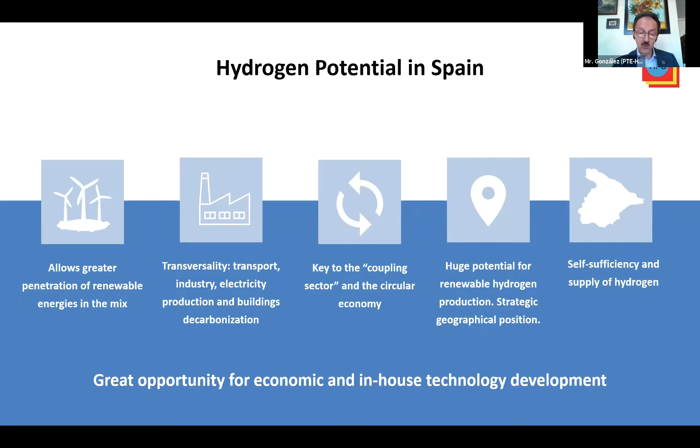Taking into account all of that, in the case of Spain, our potential is based on the capacity to produce renewable electricity at low cost, which means we can produce renewable hydrogen at low cost also. It is also based on our geographical position, which is strategic. And also, we believe it's based on the capacity of our industrial fabric, which will allow self-supply of hydrogen and even export of surpluses to our northern neighbors.

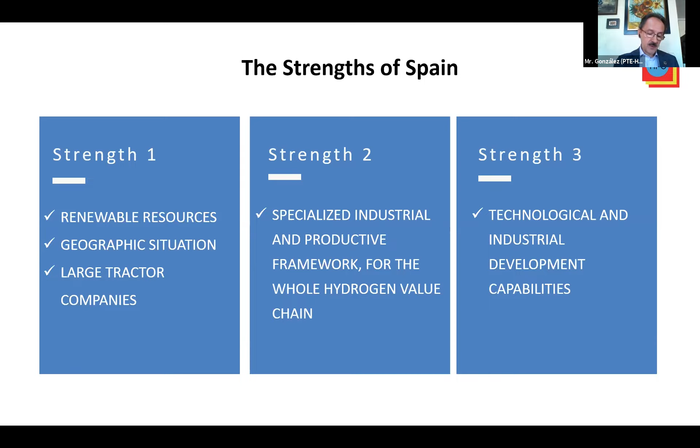This slide summarizes the strengths of Spain in the technology. As I said, we have a high level of renewable resources, a very good geographical situation, large tractor companies in place, a specialized industrial and productive framework for the whole hydrogen value chain, and technological and industrial development capabilities available. So the current context offers the Spanish sector some opportunities, but at the same time the sector has to face some weaknesses that I will summarize in the following slides.

Firstly, the opportunity to have a made-in-Spain technology faces the weakness that we have in public-private collaboration. We have a very good global position in terms of international scientific publications, between 3 and 4% worldwide, which clearly exceeds almost double the contribution of Spain to the world GDP. But this knowledge is not well transferred to industry. So what is required here is to orient R&D plans to industry objectives, and to promote technology clusters in order to facilitate science-technology-industry collaboration.

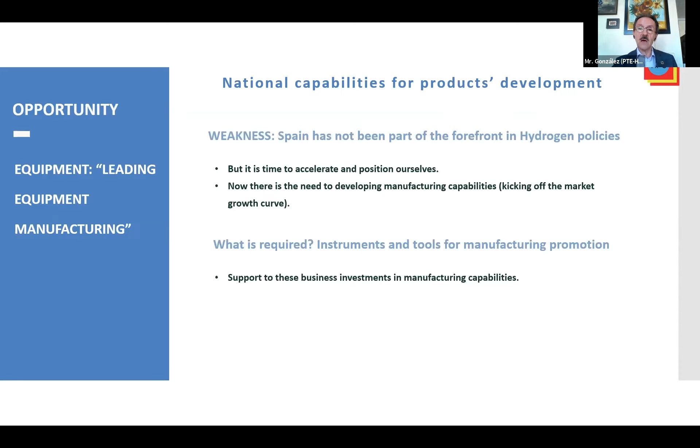Secondly, we can achieve a national capacity in products development. However, the weakness here is that Spain has not been at the forefront of hydrogen policies during the last years. Therefore, it is necessary to press the accelerator. I really believe that we are accelerating very rapidly, but there is a need to develop manufacturing capacities, and this requires strong investment support.

And thirdly, we have the capacity to self-supply and even export hydrogen, but our weakness is that we start from scratch. Of course, I must recognize that we already have a framework for promoting hydrogen, but it is essential to deploy strategic national projects to promote demand creation and to eliminate administrative and regulatory barriers. All of that implies a very diverse set of regulatory actions on both sides—the end-use side and the production, storage, and transport of hydrogen side—including, of course, the guarantees of origin.

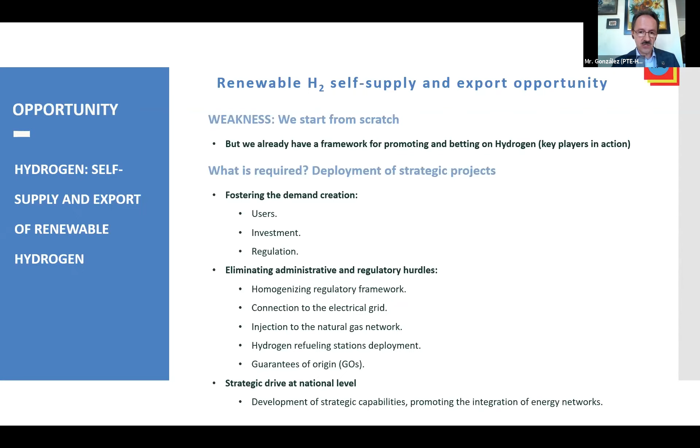In December 2020, we published an analysis of the sector from the point of view of R&D activities. And in March 2021, we published two reports: one in which we gather the ongoing activities, the projects in R&D, but also another report, which is a guide including all the members of the technological platform and the technology available to each of them.

It's also important to say that the Spanish Hydrogen Association is in the process of finishing the sectoral agenda of the hydrogen industry in Spain, which is a document that will be included within the strategic framework of the Spanish industry. For several months, three working groups dedicated to market and technology, to priority measures and actions, and to R&D, with the coordination of the Spanish Hydrogen Association, have been working on the development of this agenda.

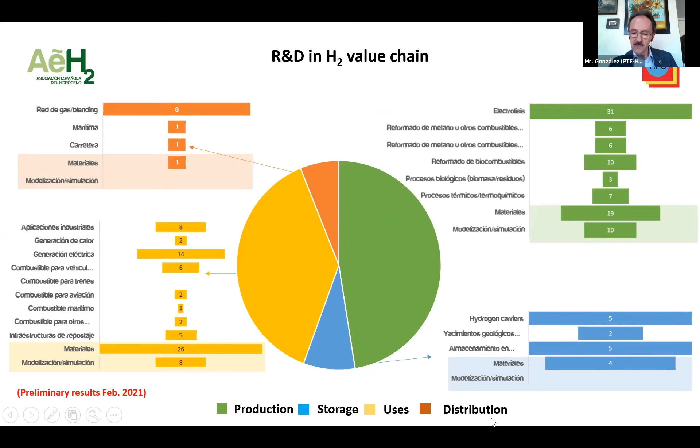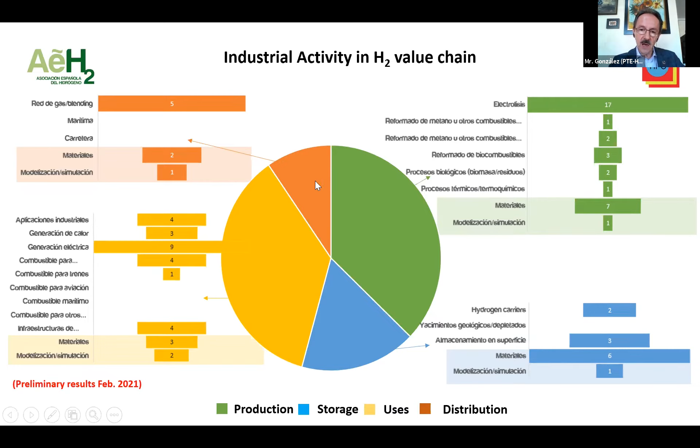But if we go to industrial activity in the hydrogen value chain, once again, industrial activity on production and uses of hydrogen dominates. But now the activities on storage and distribution take a bigger part of the pie. Concerning potential business lines, there's a more balanced distribution, but in any case, engineering, consulting, promotion, and equipment manufacturing are the dominant ones, followed by R&D, the supply of materials and components, and finally the distribution of equipment.

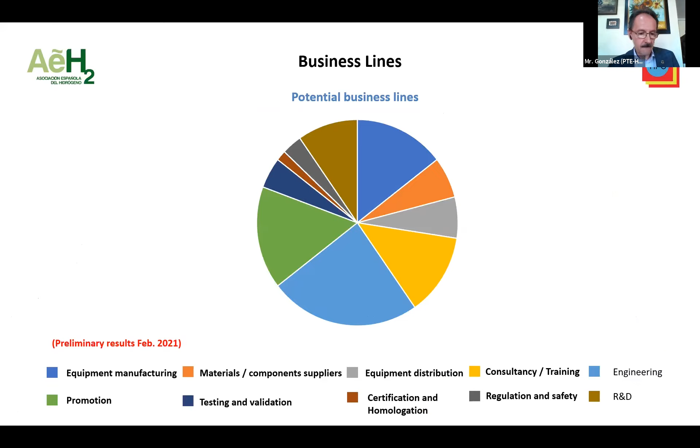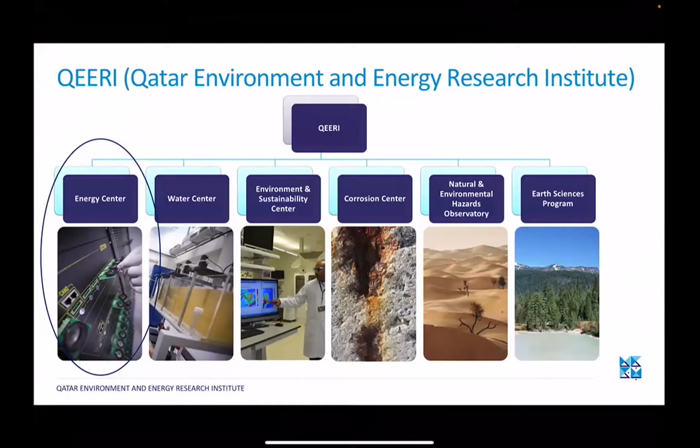So just a very brief introduction, to complement what Dr. Mark told you a few times this morning. QEERI is composed of four main centers, one program and one observatory, and I'm leading the Energy Center, where we are trying to help Qatar in its actions. Qatar is taking a range of actions to reduce its greenhouse gas emissions, to reduce its carbon footprint, and to position itself as a leader in the development of climate change and clean energy technologies.

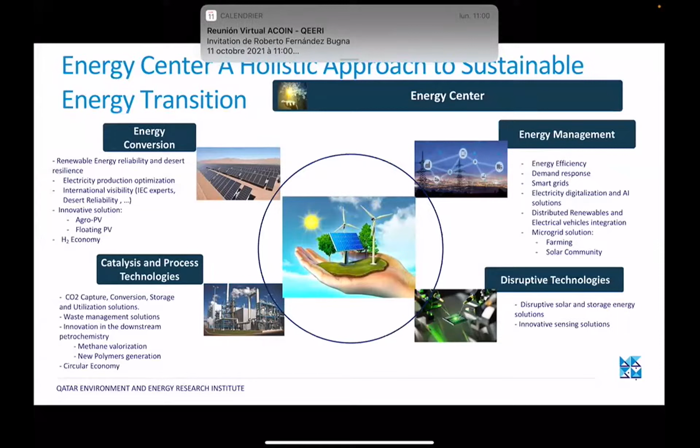So domestically, Qatar has a renewable energy goal of sourcing 20% of the country's total energy from renewables by 2024, which is something that is happening all around the globe with the different countries' net zero emission targets by 2050. So developing clean technology is also a focus for Qatar, given its natural resources, an opportunity to develop technologies that address specific climate change challenges for Qatar and the GCC, and that can be commercialized and exported globally.

And these are things that we are doing in the energy conversion program and the energy management program, two of the 4 programs we have in the energy center that are related with clean energy and energy transition. However, there is no realistic path to meet net zero targets that only involves going towards renewable energy. And there is no realistic path to net zero that involves abandoning fossil fuels completely or even stopping industrial activities.

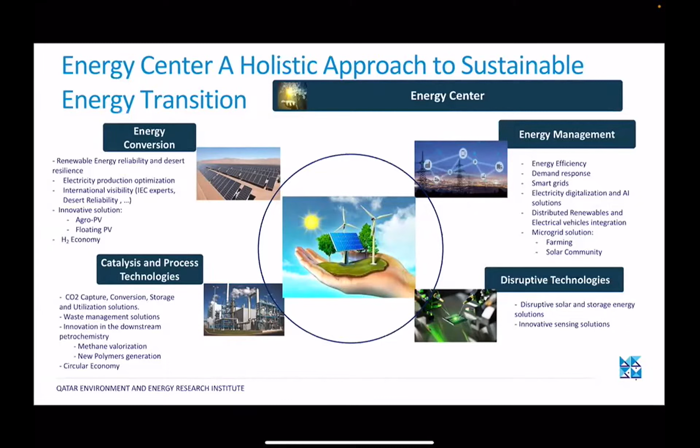And this is why if we think of a sustainable industrial and societal development with net zero emissions, this can only be achieved through a collective effort of adopting commercially viable and renewable technologies, along with enhanced utilization of natural gas, CO2 and CO2 derived feedstock. And this is what we are taking care of in the catalysis and process technology program, and this is the subject of today's discussion.

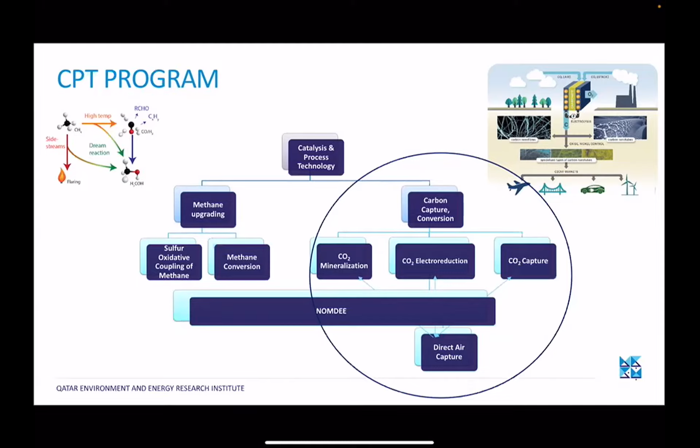In the catalysis and process technology program, we have 2 main axes of research. One is related with methane upgrading, and the other one is related to carbon capture and conversion or utilization, which will be the subject of the discussion about the projects that we are having here in QEERI, and that are really close to the industrial needs.

QEERI's Energy Center mandate is to support the competitiveness and sustainability of Qatar's energy sector, as I told you before. And what we are doing in these carbon capture projects is to develop technologies and innovate in the uses of CO2 through the development of new technologies to make this technology more attractive to the market.

So our main project for carbon capture is related to direct air capture and conversion. What we are trying to do here is to reduce the industry carbon footprint by converting waste to revenue and ensure sustainable industry development. So in this part, we are working on direct atmospheric capture, as I just told before, and this technology is under development.

It uses innovative materials and practical novel CO2 absorption and regeneration to bypass and reduce the high consumption stages compared to the other CO2 capturing technologies that are developed worldwide, mostly at emission sources very close to the facilities and industries that produce the main streams of CO2.

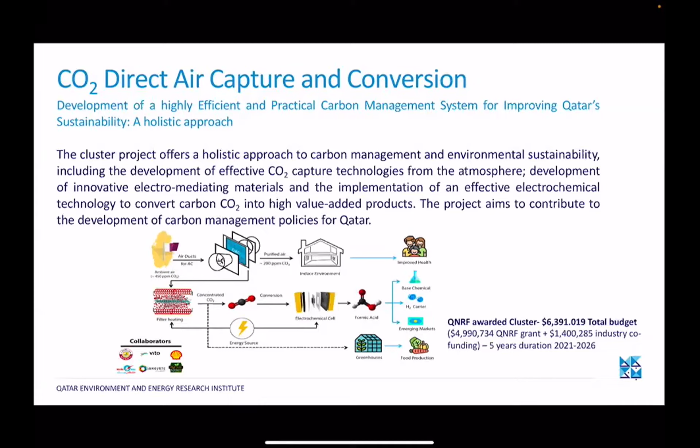In particular, this project is a program that has 5 sub-projects. It has been funded by QNRF with a total budget of $6.3 million, with 5 million from a QNRF grant and 1.4 million from industry co-funding. And as you can see here, we have a large number of partners inside Qatar contributing to the development of this project, as well as international partners.

With this research, we aim to contribute to tackling the environmental issues related with CO2 emission in Qatar and globally. And all these economic and environmental factors will keep Qatar away from the perception of being a polluted country, which is a wrong perception, together with contributing to improve the quality of life in Qatar and potential enhancement of national incomes and economy. We expect the project outcomes will attract investment in CO2 reduction technologies by private companies, as well as national and international research grants.

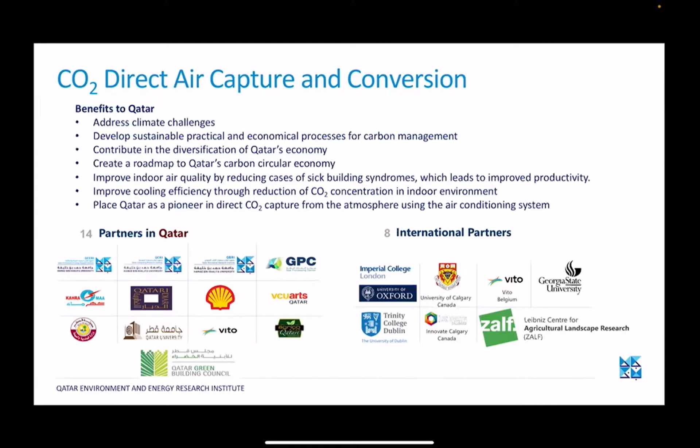If we move to the conversion part, at QEERI we are focusing mainly on CO2 mineralization to produce carbonate products. As I indicated before, we are mainly focusing on CO2 reduction to electrochemically convert CO2 into less polluting and more valuable chemicals, CO2 absorption, and of course, CO2 mineralization.

Why CO2 mineralization? The CO2 mineralization project has the potential of tackling three main issues of global and national relevance in Qatar, which are CO2 emissions, brine waste from desalination processes, and alkaline waste. So CO2 mineralization represents a hot topic in order to bring sustainability and mitigate the challenges associated with CO2 utilization.

The purpose of this specific project is to transform CO2 into solid, stable carbonates, mainly magnesium and calcium carbonates, that can be used in the construction industry, but not only. As you can see, there are many uses for this. Many industries use these carbonates: the textile, paint, paper, and plastic industries, for example, for calcium carbonate, and skincare and cosmetics for magnesium carbonate.

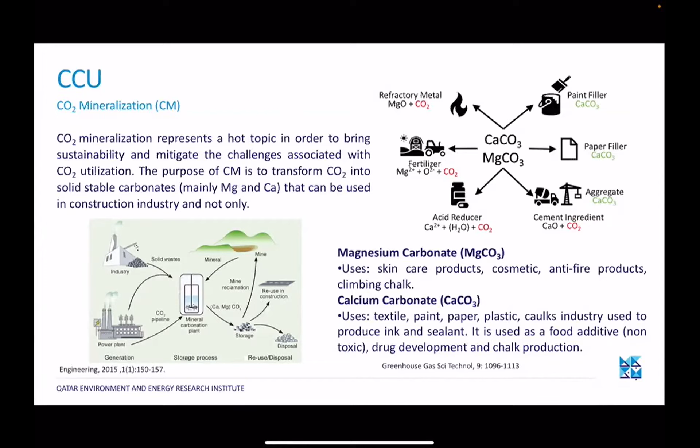We are focusing mainly on magnesium and calcium carbonate, but they are not the only carbonates that we can obtain with our process. We have proof of concept of barium carbonate, aluminum carbonate, lithium carbonate, sodium carbonate, and all of these kinds of carbonates that have a wide use in industry.

What we are aiming for is to develop sustainable, practical, and economical processes for carbon management, while at the same time targeting carbon neutrality and addressing decarbonization challenges in main industrial sectors that are not easy to decarbonize, not just decarbonizing electricity production. I am speaking here of the oil and gas industries, the metal manufacturers, and the petrochemical industry.

In doing that, we are aiming at the same time to address brine waste management, which poses serious challenges in the region, but not only in the region, in all those countries that heavily rely on desalination and the disposal of brine waste. At the same time, we are also looking into the disposal of alkaline residues.

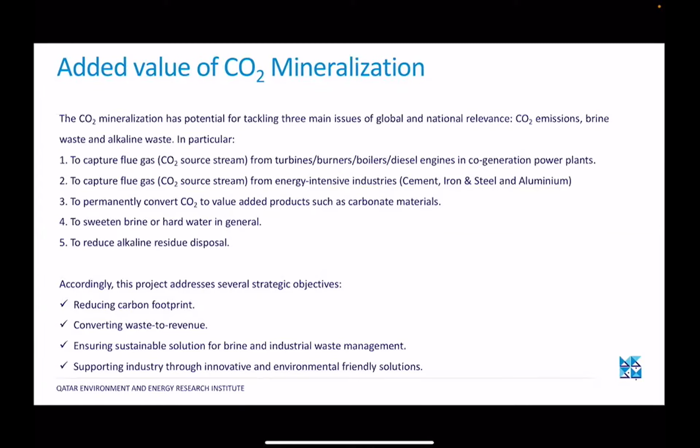If I move a little bit in depth into alkaline industrial waste, I can share with you why we are focusing here. It is because we really think that this application has strong benefits for alkaline waste management and disposal, and not only disposal, it is creating another value for this waste, if I may say, to provide a circular economy in these kinds of industries.

So, just a few numbers. Alkaline waste is produced in more than 1 billion tons yearly, and it's potentially toxic. Alkaline waste is produced and piled in landfills every year, and often it has devastating effects. Our process here is tackling these challenges from an environmental point of view.

Also, alkaline waste can be solid or sludgy. It mostly involves slags, ashes, or muds, and is formed as a byproduct of steel, aluminum, and coal power plants, waste incineration, or demolition wastes. So you see that we are tackling many industrial wastes from heavy industries that are difficult to decarbonize, and we are not only helping to decarbonize these industries, but adding value to this waste.

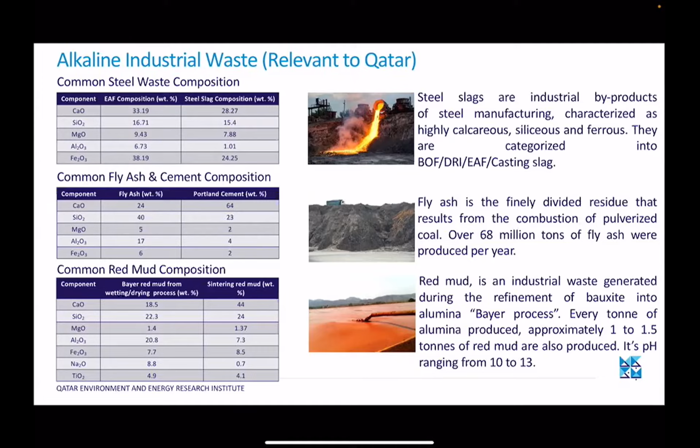Of course there are a lot of challenges, but we at QEERI are very well positioned today in waste management for steel slags, fly ashes, and red mud, and to combine this waste management with CO2 decarbonization.

So what about hydrogen? Because the topic of the conference, this discussion, is CO2 management and hydrogen. What about hydrogen in Qatar, and what are we doing in the field of hydrogen? Today, to our knowledge, there is no real national hydrogen strategy or plan, or at least it has not been publicly communicated. So we cannot speak for the country, but we can share our thoughts and what we see is happening.

So the industry seems to be developing strategies, but as I just said before, there are no public announcements or large scale projects. There are some small demonstration projects being announced, and there have been some QNRF Qatar National Research Funding programs to finance them.

There are, however, some enablers that start to be in place. Gray hydrogen production already exists within industrial complexes here in Qatar. CCS capacity, carbon capture and storage, is being built, and this is mainly linked with LNG trains and solar energy deployment, where QEERI is heavily involved at the national level, is progressing, and more capacity is planned.

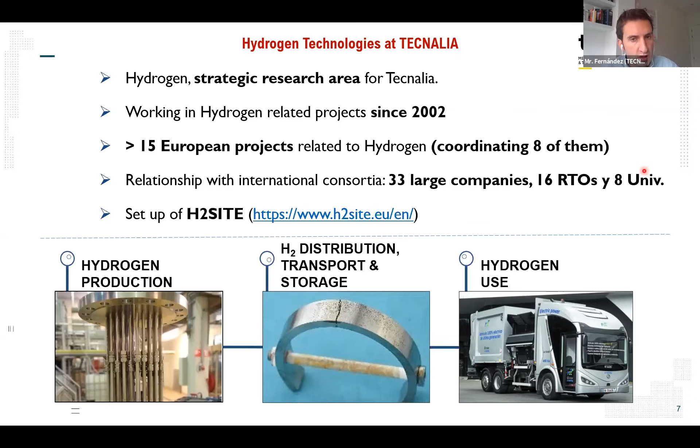To give you some examples of projects where we are working, these are mainly European projects on hydrogen. The first one, the Macbeth project, where we are working on scaling up membrane reactor technology for hydrogen production from two feedstocks, natural gas and biogas, by a reforming process. The aim here is to go from TRL5 to TRL7 in this project, and one of the objectives is to test this membrane reactor technology for at least 8,000 hours in operation.

Another project where we are working is the HyGrid project, where we are developing membrane technology, in this case for hydrogen extraction from hydrogen-natural gas blends, dedicated for distribution grids. As you may know, one of the promising ways to distribute or transport hydrogen is through the grids, the pipelines. In an initial step, the idea is to have a blend of hydrogen with natural gas, and the idea of this project is that at the final point, for the users, we extract this hydrogen that is blended from the natural gas.

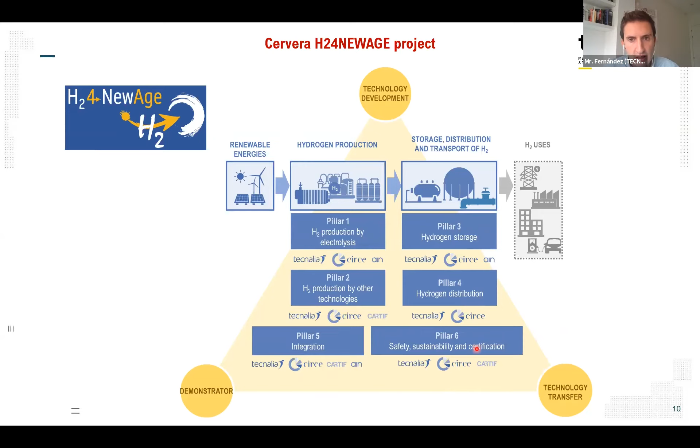So that's all from my side. Thank you very much. If you have any question or want to contact me, I will be glad to answer. And of course, we will be very happy to try to have further collaboration with QEERI or companies from Qatar.

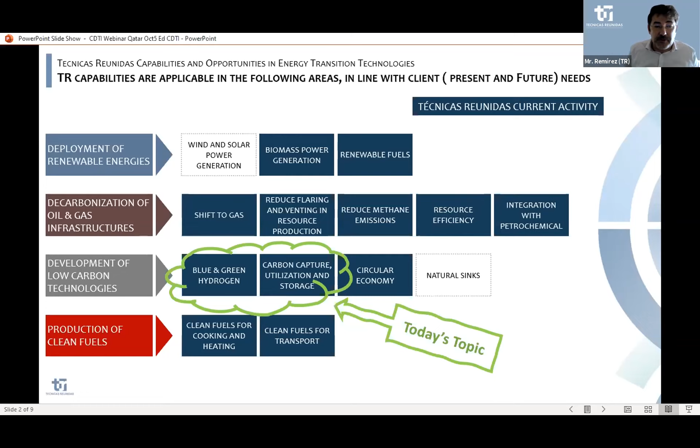Today we'll go more specifically into hydrogen and CO2 capture and utilization. On hydrogen, the topic is basically that we need to address a multi-scale and multi-sectorial exponential growth. Hydrogen isn't just something devoted to oil and gas facilities; it's something needed worldwide, and it's just growing. So the thing is how to be sure that we can make a proposal to our clients in this way.

One of the first interesting lines here is biofuel reforming. It basically means today the main activity, the main way to produce massive H2 is through reforming. What about using something which is not just plain natural gas, but maybe biogas, or other fuels like bioethanol? Thinking on big capacities, not small capacities.

On site reforming, as I was saying before, we are thinking also of the solutions related to hydrogen refueling stations. One thing is to have a technical solution for big industrial complexes as far as hydrogen production is concerned. The other thing is to do that with the hydrogen refueling station, where most of us think that maybe in a decade we'll just be fueling our cars with hydrogen. The technologies behind that may not be strictly the same as the ones we use in big facilities.

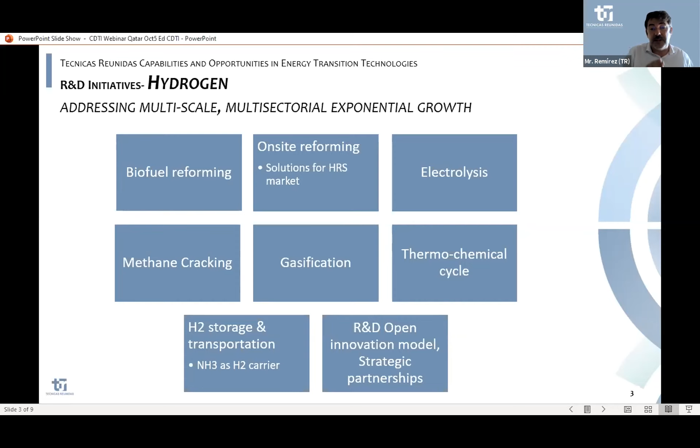We are firm believers of open innovation models here. We're not saying that we're not making developments on our own. Obviously, as a company and any research and development center, we have in-house IP. But the thing is that we also believe that we can go very far by finding the right associations, so that the products we firmly believe in can go one step further in terms of maturity.

On CO2, there are two things here. One side is what would be the workhorse here, which is amine scrubbing and absorption with amines, where we are at a level of innovation. It's not really R&D, we're innovating and trying to see what could be almost state-of-the-art solutions in terms of amine scrubbing that can be adapted to specific needs. One specific need we all have in mind is getting blue hydrogen out of gray hydrogen. You get your normal, standard H2 production, and you need to find a way to get this capture done. So right now we're really working on these innovative solutions in this technical field.

The other fields are fields we are already also working on. We are very interested in ionic liquids, obviously PSA, MOFs and polymeric membranes, but I would say at a lower tier and at a lower scale. Our feeling is that provided we get a good understanding at a smaller scale, but also attending to the scales I was mentioning before, I would say the hydrogen refueling scale, we think the maturity gained at this scale will be something that can be quickly extrapolated to larger capacities and initiatives.

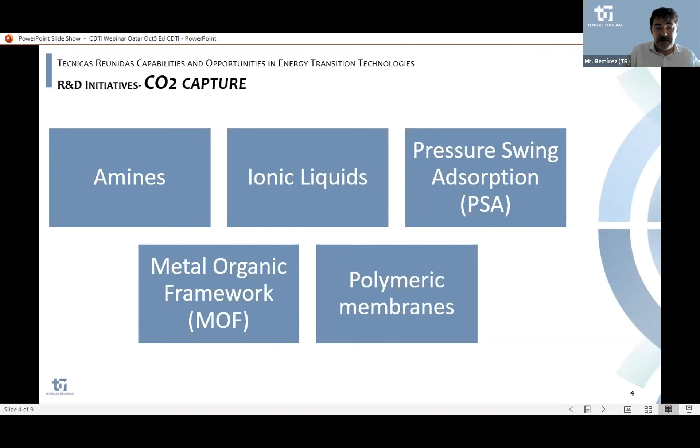On the projects mentioned before, the H24NewAge project that TR is leading right now. It's a project based on the grant given by CDTI. Basically, we're leading a consortium of 7 companies and 6 R&D centers.

One of these being Tecnalia, which just explained what we are doing right now in this field. With this project, the goal is to develop underlying technologies across the full value chain of hydrogen. We're not saying we'll find a straight solution by the end of a 3-year investigation project. This is industrial investigation, so the idea is to work on a large number of technologies that are all linked together because of the hydrogen value chain.

Our proposed value is basically twofold: on one side, we work on generating hydrogen while trying to minimize CO2 production as much as possible. On the other side, finding the most adapted way to produce hydrogen from diverse sources of raw material.

The second part is really working on the vehicle itself. We talk about fuel cell vehicles adapted for this, and we're also going to work on hydrogen storage in this environment—700 bar, which is basically the standard now for storage on cars—and make investigations to make the storage smarter over time.

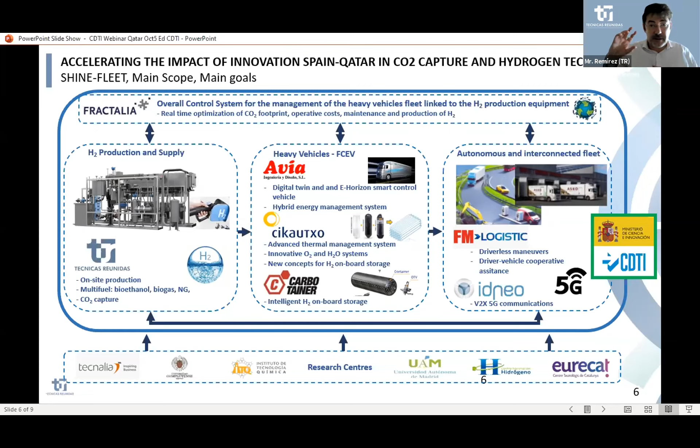So the idea is to do a lot of investigation to reach a global optimum, making sure we don't have any shortage in the service of these trucks, and also that we have good adequacy and minimum operating cost for the global solution, involving production on one side and consumption on the other.

On the specifics of hydrogen and CO2, we'll be working on catalysts for biofuel reforming—absolutely critical and very interesting—as well as specific design of heat transfer equipment and reactors. For separation, we'll be working on polymeric membranes, metallic ones, PSA for mixed streams, and ionic liquids.

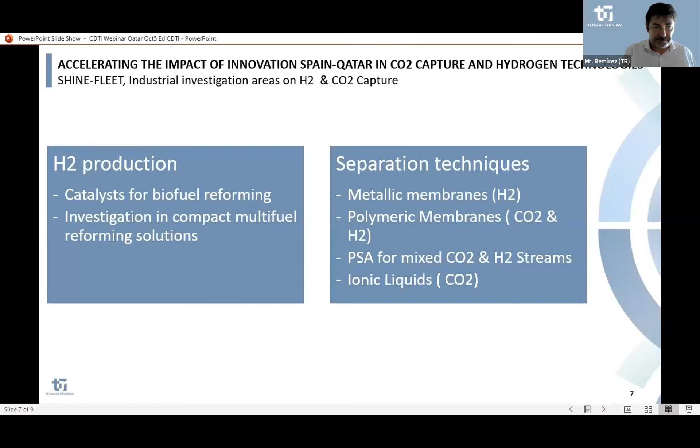The closing thought: we have the capacities to do a wide range of things and attend to a wide range of client necessities in energy transition matters, and can deliver active solutions on either H2 and CO2.

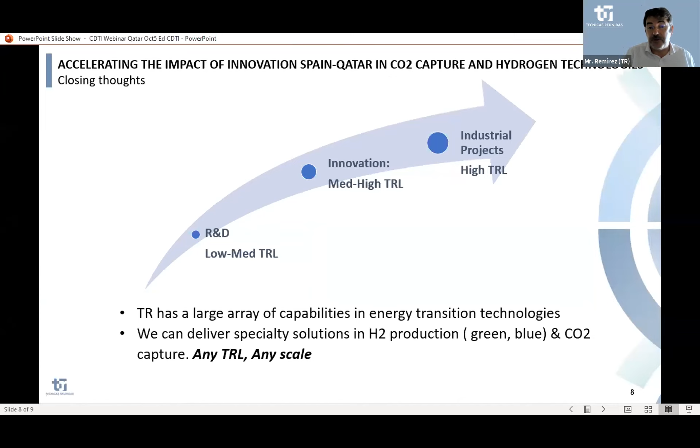We're putting any TRL, any scale. The thing is that we need to work and understand better, and grow our technology, so that we are in a situation to understand and supply better solutions for tomorrow's needs.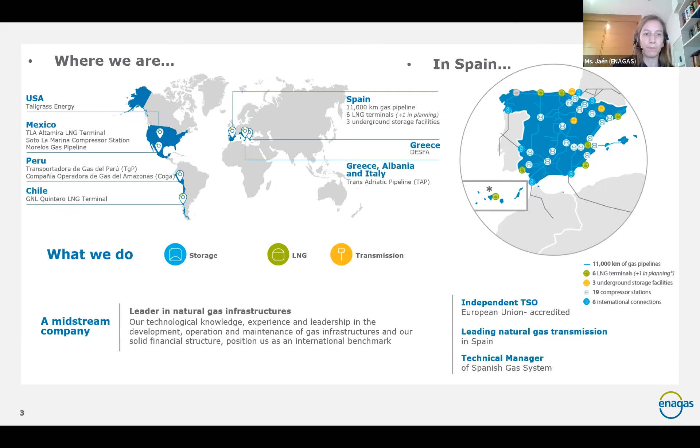I would like to share with you the Spanish vision for 2030 regarding green hydrogen. In October 2020, the Council of Ministers, on the proposal of the Ministry of Ecological Transition here in Spain, approved the Spanish hydrogen roadmap. It's a green hydrogen roadmap, and it includes 60 measures regarding 4 areas of action: regulatory, sectoral, cross-sectoral nature, and R&D promotion. So here I have included some key figures regarding this Spanish hydrogen roadmap.

The idea is to install at least 4 gigawatts of electrolyzer power. Regarding the industry, a minimum renewable hydrogen contribution of 25%. We have also targets for the mobility sector. And of course, regarding the environmental impact, the target is to reduce emissions by 4.6 million tons of CO2. The estimated investment of this total hydrogen roadmap is 8.9 billion euros.

So in this context, ENAGAS has always had a very strong commitment to the energy transition and the decarbonization process. We think that renewable gases will play a key role in this energy transition. They will enable decarbonizing hard-to-electrify sectors, and the use of existing gas infrastructure is key in order to achieve these targets at low cost and on time.

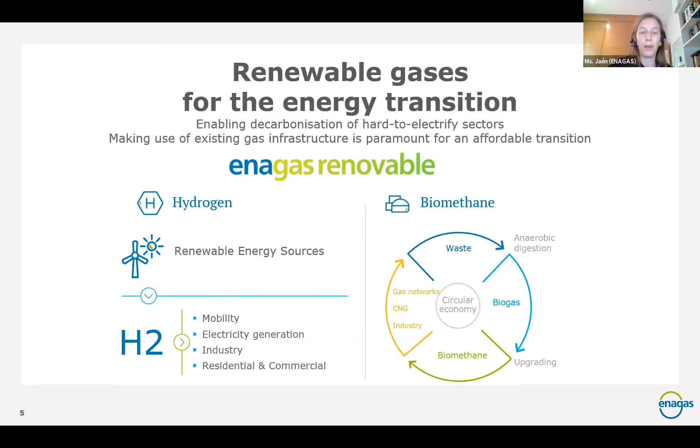We are also very interested in power to gas. We think that the deployment of renewable energies to achieve the targets that the Spanish ambassador in Qatar mentioned before for 2030, 2040, 2050 requires increasing the flexibility of the grid. There are a lot of ways to do that, but we think that one important way is to have a flexible energy storage system. Hydrogen is an option for energy storage. It can store large amounts of energy for long periods of time.

You can obtain renewable energies and then produce green hydrogen through electrolysis. This green hydrogen can be used in all the sectors. It can also be stored underground. If you use CO2 capture, then you can do methanation, so you can inject the hydrogen or the biomethane directly into the natural gas network. So you are really connecting the power grid and the natural gas network. You are doing sector coupling here.

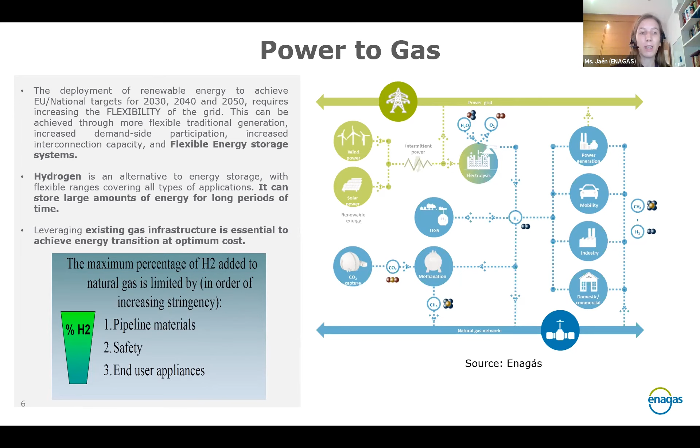We are now studying the maximum percentage of hydrogen that could be injected into the natural gas grid. As I mentioned before, leveraging existing gas infrastructure is essential to achieve the energy transition at optimum cost. And of course, we have to work on the materials, on safety, and on end user applications.

Here, I would like to share with you an initiative called the European Hydrogen Backbone Initiative. European hydrogen infrastructure is needed for Europe to achieve its climate and energy objectives. The European Hydrogen Backbone Initiative report, published in July 2020 and developed by 23 European gas infrastructure companies, demonstrated that this can be achieved based primarily on repurposed existing gas infrastructure, combined with targeted investment in new dedicated hydrogen pipelines and compressor stations. So we are sure that hydrogen can efficiently be transported through these natural gas pipelines.

And of course, there are some adaptations that will be required. In this study, there are three horizons: 2030, 2035, and 2040, and there are different targets for each horizon. For 2030, we will develop emerging regional networks connecting industrial clusters to an emerging infrastructure of up to about 7,000 kilometers. Then up to 2035, this backbone will grow, expanding this network, covering more countries, and of course linking different countries across Europe.

And by 2040, there will be a European hydrogen highway, because we think that a pan-European backbone is stretching into all directions. There will be more than 23,000 kilometers. 75% will be retrofitted natural gas pipelines, and the rest of the 25% will be new pipeline sections. So this study shows that the total investment cost will be between 27 and 64 billion euros, which means that the cost of transport will be decreased to 0.09 to 0.17 euros per kilo per 1,000 kilometers.

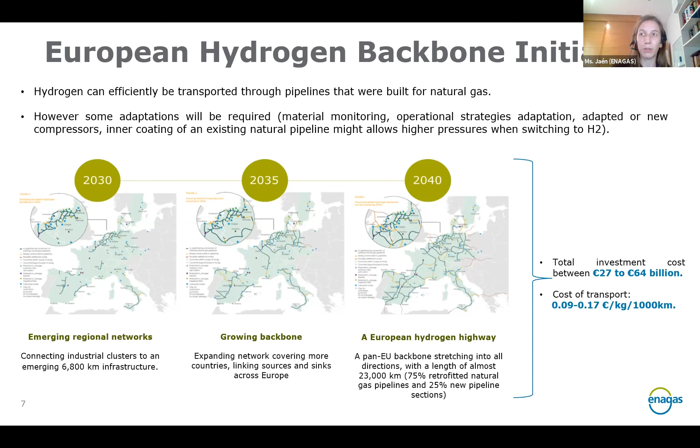In this framework, Enagás is developing more than 50 projects related to renewable gases. About 35 projects are focused on hydrogen. So we are developing 3 or 4 kinds of projects. The first one is projects that include the whole value chain of hydrogen, from the renewable sources through the hydrogen production infrastructures, the transmission, transport, and distribution of this hydrogen, and of course the end users. So the idea is to develop large-scale projects for the decarbonization of the economic sectors.

And of course, we will need to retrofit and upscale the natural gas network. We are considering both blending natural gas and hydrogen, as well as dedicated hydrogen backbones towards Europe. In that sense, we are developing the project IPCEI Green Crane, which includes more than 30 of the projects I mentioned before. The idea is to connect the south, where hydrogen will be produced at a competitive cost, to the center or north of Europe, where the end users are waiting for this green hydrogen.

Another kind of project is demonstration projects at industrial scale. We think that the concept of electrolysis, hydrogen and the fuel cell is more than proven. So we would like to develop industrial projects regarding hydrogen in order to help implement the hydrogen economy. In that sense, one of the projects that we are developing is the Green Hysland project, which is funded by the Fuel Cell and Hydrogen Joint Undertaking from the European Commission.

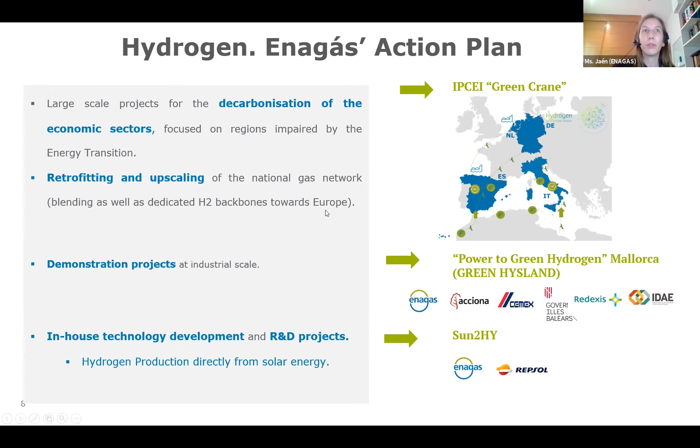I would like to highlight 2 real projects that we are involved in. The first one is the one that Mr. Fernandez from Technique mentioned before, the Renovagas project. It started in 2014 and finished in 2017. The goal was to develop, construct, and experiment with a 15 kilowatt power to gas plant for the production of synthetic natural gas from electrolytic hydrogen and its methanation with CO2 from a biogas stream.

So we operated this pilot within the project in real operations, complying with the Spanish quality standard for natural gas. Within the project, we optimized the hydrogen production. Then we developed a catalyst, a methanation reactor, and the engineering to scale up the plant to 250 kilowatts. And then we included the development study of different power to gas plants in Spain. We developed this project with FCC Aqualia, Gas Natural, Abengoa, and with the research center CSIC, Centro Nacional de Hidrógeno, the National Hydrogen Center, and Tecnalia.

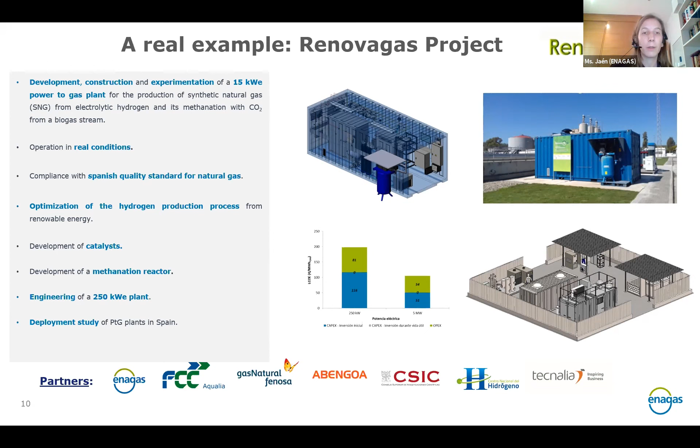Another project that I would like to highlight is the Melhai project. It's the Moroccan project of underground hydrogen storage. We applied this project to the INNOSPAR Maroc bilateral call with Morocco that was launched in March 2020 within the framework of CDTI and IRESEN. And they approved the project, and we expect to sign all the financing agreements and so on in the coming weeks.

So the consortium is participated by Green Energy Park, which is the coordinator. And then there are other partners, which are HDF, SOMAS, the University of Ibn Tufayl, and Enagas. We expect a project duration of about 40 months.

Really, the main objective of this project is to develop the pre-feasibility study of a hydrogen geological storage project in a salt cavern in order to collect the existing information on the subject and the relevant data for a more specific future feasibility study. So this pre-study includes, of course, the project management, which is led by GEP.

We will study the applicable regulatory and legal framework. So we have to talk with the authorities and study the legal barriers and constraints before launching this technical study. These activities will be developed by HDF and SOMAS. Then we will select the optimal locations in order to see specifically in this location what will be the studies to carry out, where the pilot project will be constructed, and the future phases of the project.

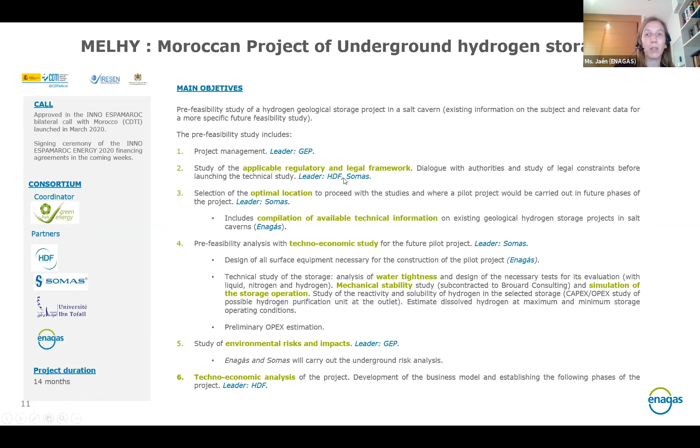And then we are going to develop a techno-economic analysis of the project in order to see which will be the best business model and what will be the next steps in order to construct and build this pilot. So this is just a couple of examples of the projects that we are developing. We will be more than happy to discuss with all the audience potential collaborations and more initiatives regarding these hydrogen technologies.